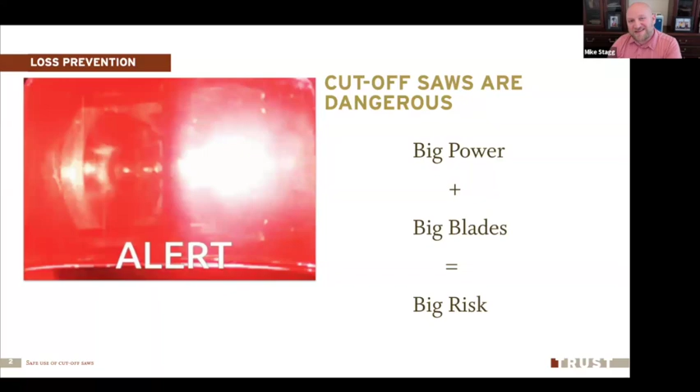These folks are now back to work, they're doing great, but this is something that's going to live with them for the rest of their life. We don't want it to happen to you, we don't want it to happen to anybody. We want to make sure we do these things right when we're using these pieces of equipment, every single time. These are very dangerous pieces of machinery, and we have to treat them with the utmost respect. That's why it's important.

We're going to talk through a four-step process to make sure we do it right and keep it safe every single time. We have to know the tool, we've got to know what we're dealing with, know the beast, how to use the beast safely. We have to know its hazards - what are things that could get us in trouble, and how do we avoid those hazards. And lastly, we've got to know the proper PPE to wear. We're going to talk about each of these four things separately today and how they play into keeping us safe when using this piece of machinery.

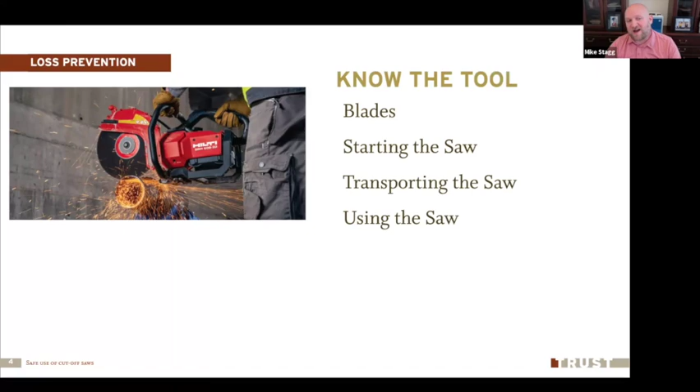First off, we've got to know the tool. As we talk about knowing the tool, it's another four-step process: the blades - got to know the difference between different blades that can be installed on these saws, because that's important and helps drive some of the safety requirements we're going to talk about. How we safely start the saw, how we safely transport and move the saw, and lastly, how to actually use that saw and do it safely. All goes into knowing the tool.

Let's talk about blades first. The first blade is probably the one we use the most, probably our most common - it's the diamond blade. Now, all the blades are going to have plastered right on the front of them what kind of blade they are, what they're rated for, what kind of media they cut through. All that kind of stuff is going to be listed on the blade itself.

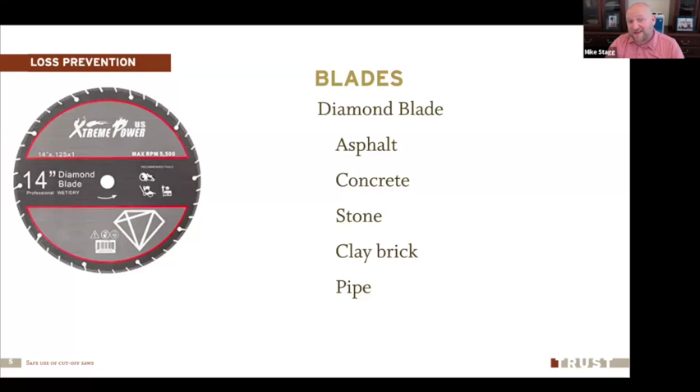With the diamond blade, they have teeth - they can be aggressive, they can be not very aggressive. These diamond blades are used to cut asphalt, concrete, stone, clay brick, and pipe. So that's the kind of media that they're used for, and those are the only types of media they're used for.

Also with the diamond blades, they are made precisely for their intended use. Don't use a diamond blade on a piece of media that it shouldn't be used on. They are rated and used for your saw's specific RPMs, so make sure that you match the RPM of your saw with the RPM of the blade. Don't use a blade rated for a certain RPM on a saw that goes to greater RPMs than what that blade's rated for. What can happen? That blade can break apart on you. So we've got to make sure we're using the blade precisely for its intended method within the specified RPMs of the machine.

Now with these diamond blades, there are a couple of different kinds of orientation with the teeth. More teeth on them is going to equal a smoother operation of that blade.

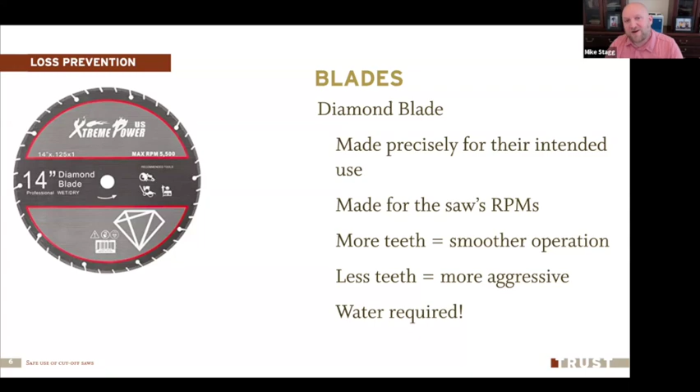What's important to note with the diamond blade is that water is always required when you use a diamond blade. No exceptions, you've got to use water. These blades build an intense amount of heat and they need to be cooled down, so we've got to make sure we use water with a diamond blade.

Your other blade that you can use is what we call an abrasive blade. An abrasive blade doesn't have teeth, it's an abrasive piece of material. We can use these as well for asphalt, concrete, and stone, much like the diamond blade, but these blades are specifically for ductile cast iron and steel. So if you've got ductile cast iron, maybe old pipe you're using to cut, this is what you'd use, you'd use that abrasive blade. You wouldn't necessarily use that diamond blade.

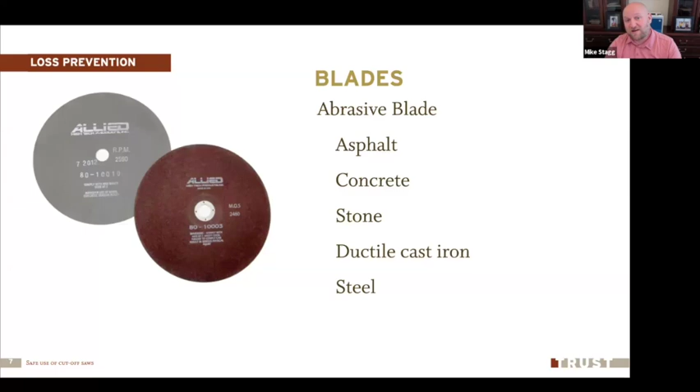This is where that abrasive blade comes into play, cutting steel, you could use an abrasive blade. Now, abrasive blades are also made precisely for their intended use and made only for the saw's RPMs, same as the diamond blade. Always only for their intended use and rated for the specific RPMs of the machine. Make sure that blade is within the range of the RPM of your saw. If your saw revs to a higher RPM than that blade can handle, don't use that blade on that saw.

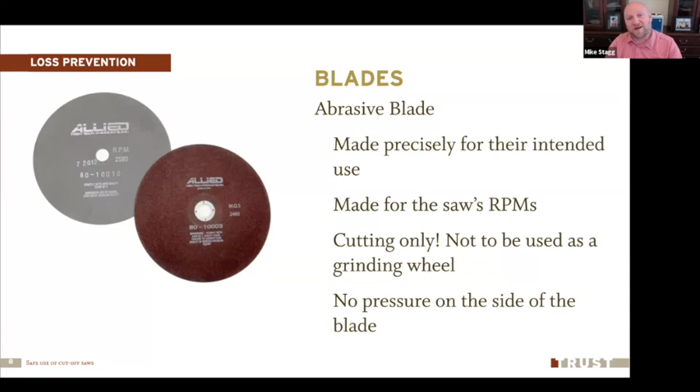Very simple, these abrasive blades are used for cutting only. We're going to talk in a few weeks about grinder safety, and we won't mention demo saws in the grinder safety webinar because they are not grinders. Make sure they are not used as a grinding wheel, they are only used for cutting. Make sure there's no pressure put on the side of these blades. If you get pressure on the side of an abrasive blade, it's going to bust apart on you. Make sure there's no pressure being pushed or put on the side of that blade.

With the abrasive blades, there's a couple of different types. You have a blade made out of aluminum oxide, and those blades we use for metal. Then you have the silicon carbide blades, and those are used for concrete. So you've got to think about this: if I've got a concrete roadway I have to cut and I'm going to use an abrasive blade, I've got to make sure it's silicon carbide. Then if I get down there and have ductile cast iron work to cut through, I've got to switch my blade out from the silicon carbide blade to the aluminum oxide abrasive blade in order to safely cut that piece of metal.

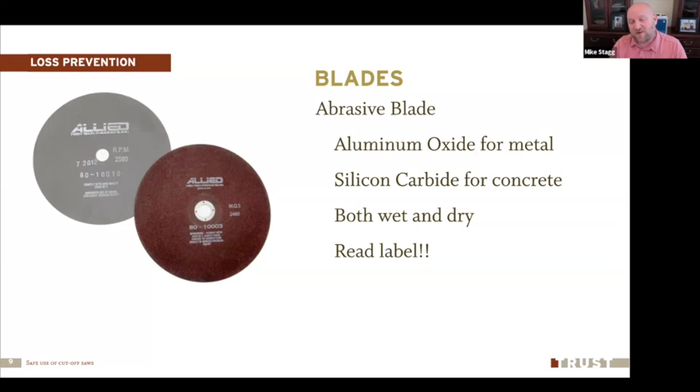Make sure you're only using the saw for its intended use on its intended media with the right type of material. All the blades are going to say right on them exactly what they can and cannot be used for, so make sure we're using it for the right type of media. Now, these abrasive blades can be used in a wet or dry application, they don't always require water. Again, read the label, manufacturer's recommendations are not just recommendations, they're requirements. Make sure you follow all the manufacturer's requirements when you install one of these abrasive or diamond blades and you're using it for its intended purpose.

Now, each time before you start the saw, you've got to inspect the blade before its use. Does that mean if I stop the blade and set the machine down, go do something else, come back and restart it, I've got to inspect the blade again? Yes, it does. Every time before you start the saw, you've got to inspect the blade. If you find anything wrong with that blade, swap it out, get a new blade in there. It's not worth it. If there's cracks or missing teeth, get rid of that blade. Don't use a dull blade, don't use a blade that's worn. A missing, irregular, or worn cutting edge on an abrasive blade is very hazardous.

Don't want to use that kind of blade. Look for a warped or unevenly worn blade, something that isn't worn correctly. Swap that blade out. A sharp saw is a safe saw.

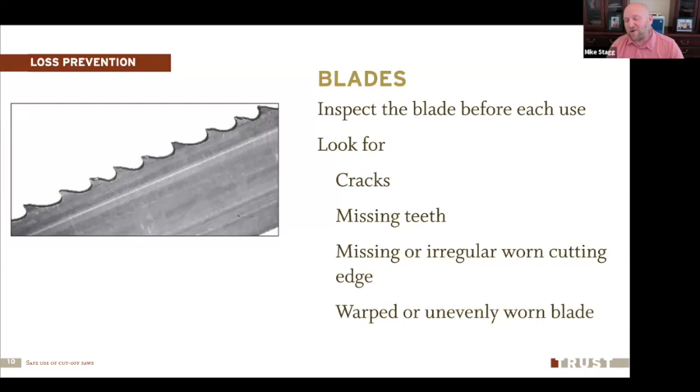A dull saw is not a safe one. Make sure that it's sharp and there's no cracks, missing teeth, or any kind of warping or irregular worn patterns in that blade. If there are, swap that blade out.

Before starting the saw, we also have to perform a visual inspection of the entire saw. We're going to inspect the blade very thoroughly, but we're also going to inspect the saw itself. Make sure we have a blade guard and it's in place.

The blade guard is not optional, guys. I know some of us move it out of the way because we can't see what we're doing, but the blade guard has to be there, has to be installed. If you don't have an installed blade guard, you shouldn't use the blade. That's simple. Adjust the guard for whatever cutting angle you're going to have.

Make sure you stay 10 feet away from any kind of fueling source. So if you bring gas cans out there that you fill up the saw with, make sure those gas cans get at least 10 feet away from the point of operation of that saw. Make sure when you're fueling up that you use the proper gas oil mix. Read the manufacturer's recommendations and requirements and make sure that you follow those to mix your gas and oil correctly so the saw functions correctly.

Always make sure you have a nearby fire extinguisher. I know many of us have those fire extinguishers on our trucks. This is a great time to get down that fire extinguisher and put it right by where you're going to be working, just to make sure that if something goes haywire, that you've got a fire extinguisher there.

Now we're going to check a lot of things in this visual inspection. We're checking that blade guard. We're going to check the rip and pull cord, make sure that it's in good shape. We're going to check all the bolts and the screws and make sure that everything's tight and secure for us when we're going to use that saw.

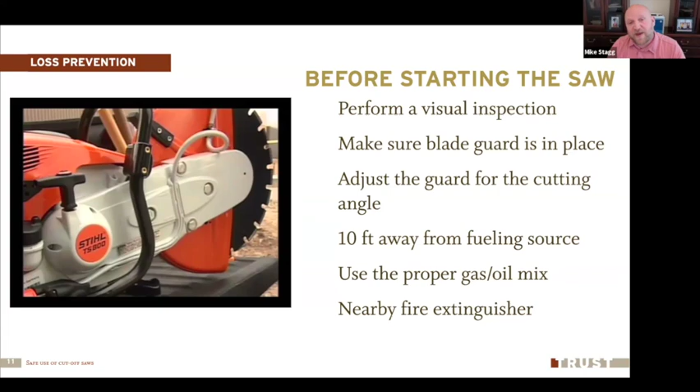Again, this needs to be done every single time before you use the saw. So if the saw's been off and you're going to turn it on and rev it back up, you need to check it again. You need to do your visual inspection again.

Now, when we talk about starting a demo saw, we're never ever going to drop start the saw. What's a drop start? You hold it in your hand and you rip the rip cord out. That's a drop start. Or you pull on the rip cord and you let the saw drop. That's also a drop start. So if we're holding the saw in one hand and pulling the rip cord with the other, with it held off the ground, that's a drop start. We don't want to do that.

These saws generate significant power, and because they generate significant power, they also generate significant torque. Torque is what is going to cause the blade to move and to walk on your pieces of material. The weight of the saw is going to cause that blade to drift downwards, because of the way the saw is weighted, the way the fulcrum is where you grab the handle on top, it's going to cause that blade to go down because of the way that saw is built.

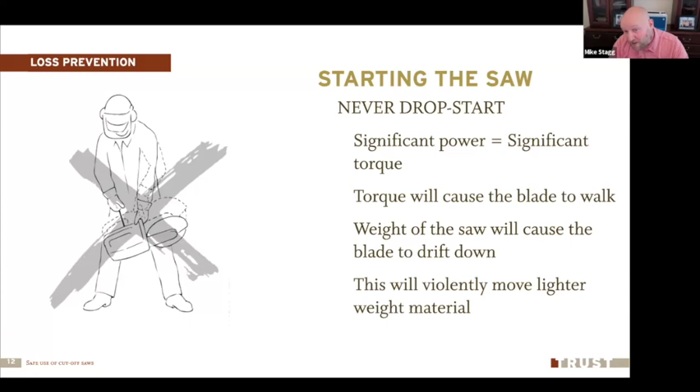What this means is when you start a cut or when you put that saw into material, it's going to want to violently move anything that's lighter weight, because if it pulls it, if it's generating that torque, it's going to want to violently move that out of the way. So it's important when we start the saw that we never drop start it.

We never hold it in one hand and rip the cord with the other. We always start with the saw on the ground. Place the saw on the ground, place one foot on the hand guard or through the handle, put some weight down, and make sure that it's secured to the ground. Make sure the area around you is clear and you're on good footing. Then you're going to hold the saw firmly, with your right hand on the rear handle and your left hand on the top stabilizer bar.

Then what you're going to do is take that right hand and rip the cord with the right hand to start it up, while placing pressure down with your foot on that bar and holding tightly on that rail in what we call a power grip.

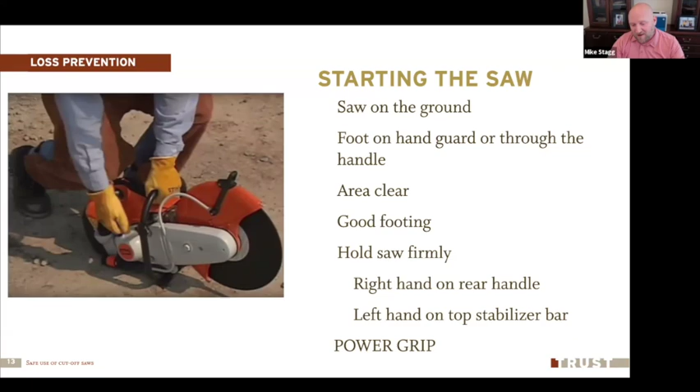Now what is a power grip, you might ask? A power grip is an underhand grip, four fingers laced all the way around that bar with your thumb locked across the top. Don't go overhand, it's easy to slip out of your hand. Underhand power grip with the bar right in your palm, make sure all four fingers wrap tightly around that bar and your thumb goes over the top.

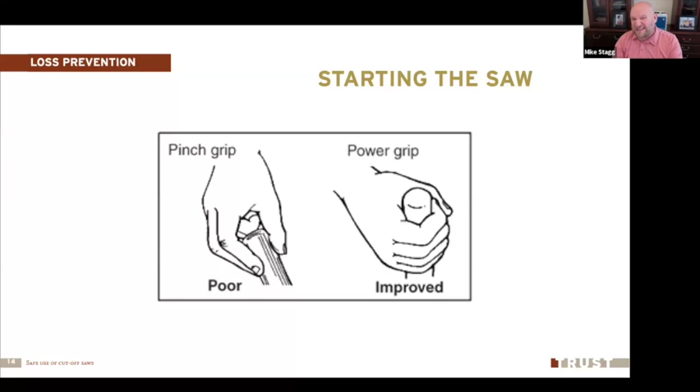Hold that thing tight. Don't let the saw control you, you control the saw. You're the master of the beast. Don't let the beast master you.

Now, when we're using the saw and that saw is ready to go, always make sure we work clear of obstacles. Make sure everything's cleared out, and there's nothing in the way that could get caught by the saw or by the material being cut.

Never ever work alone when working with a demo saw. This is not a lone wolf job. You can't just take the demo saw and say, alright, I'm going to go start cutting, you guys come out when you're ready. Make sure you're there with at least one other person, if not two, three, or four others. This is for safety, so if something does happen, you've got people there to help you. It's also to make sure we're doing it right every single time, with that other person there to help, saying, hey, did you remember to do this?

Did you remember to check the blade? Let's both take a look, make sure we both feel comfortable with how this blade looks. Make sure you're not drop starting the saw, making sure we're doing it right every single time.

Make sure there's a stocked first aid kit in case something happens, and people know where that first aid kit is and how to use it to help stop bleeding. Tourniquets - anytime you're using a demo saw, you should have a tourniquet inside that first aid kit, because if something gets sliced, that blade is slicing hot and fast. Having a tourniquet on hand is going to be critical in case something happens.

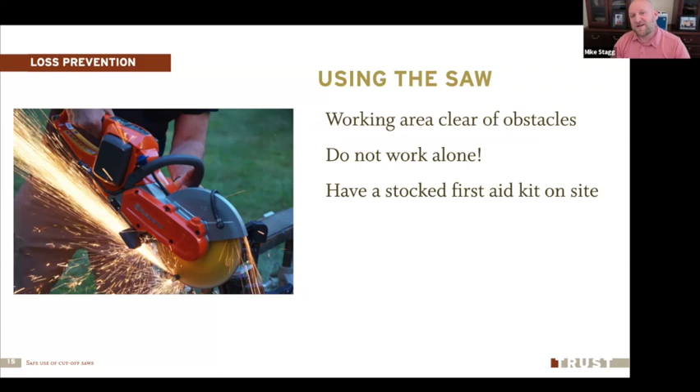Now watch for the hazards when using the saw. There are hazards that come up as you're using that saw. First and foremost is exhaust fumes - you're putting out carbon monoxide from the gasoline, from the engine running. If you're down in a confined space, you might need to do some air monitoring because you're displacing the oxygen there and replacing it with carbon monoxide.

And if the oxygen content falls below what we need it to stay inside a confined space, we're going to need respiratory protection. So never use one of these demo saws inside a confined space without respiratory protection in place. We need to have that done and in place before we start up that saw inside that confined space.

Always make sure we chock round pipes. Why do you want to chock a round pipe? Because you want to make sure that material doesn't move on you when you're making the cut, or after you've made the cut, that it doesn't start to roll away on you.

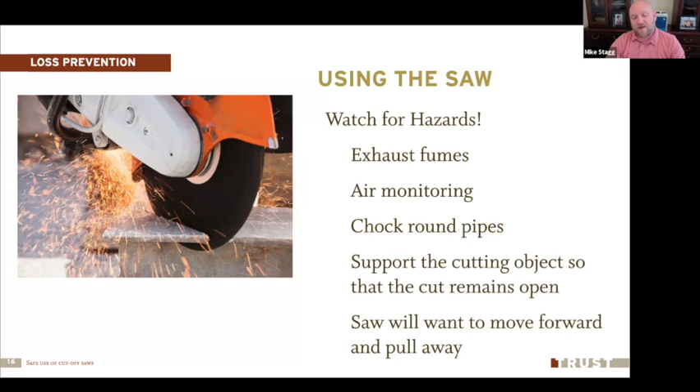Support the cutting object so that the cut remains open. Every time you make a cut with a demo saw, you want to make sure that cut is supported, so that the material, after you've made the cut, doesn't fold in on itself and pinch that blade. We have to make sure that cutting object is supported.

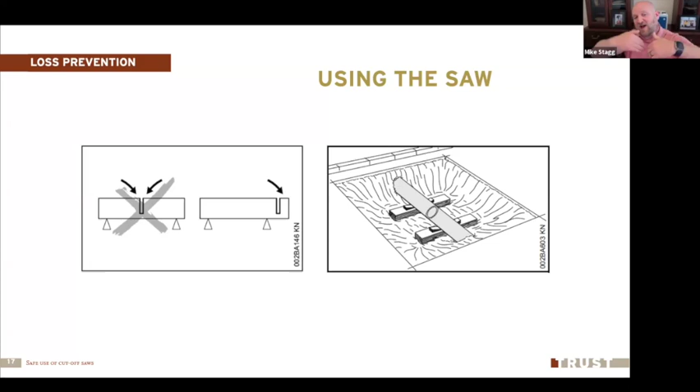Now, this is a good representation of that. You can see here on the left, we've got that cut right in the middle where our supports are on the edges. If our supports are on the edges and we make the cut in the middle, what's going to happen when that cut breaks through? Yeah, that material is going to fold in on your blade. We want to make sure we're supporting that cut and making the cut outside of where that support is. So we've supported here, like you see on the right-hand side, and we make the cut outside of the support so the spoil falls off on the end and doesn't cause the rest of the material to collapse in on itself and pinch your blade.

Very important here when using the saw is to never stand in line with your cutting wheel.

Never stand in line with that cutting wheel. Always stand out to the side. Don't have the saw right in front of your body when you're making the cut. Pull that saw out to the side as you make that cut. This assures if there is a kickback of the saw, it's not kicking back into you, into your face, and that saw is not coming back at you at full rev. Instead it kicks back up and away from your body.

Do not bend over your cutting wheel. Don't bend down and look down at what you're doing over the cutting wheel because, again, if you get kickback, it's coming right back at your head.

Do not ever work with a demo saw above shoulder height. If you have to reach up over your shoulders, you can't use a demo saw. It's too high for you. You need to make another plan to make sure you can take care of that.

Never operate the demo saw with only one hand. It's a two-hand operated tool. Make sure you do it that way every single time.

Never ever push down on the saw. Let the blade do the work. Don't push down on the saw. If you're having a hard time getting through the material where you're having to put a lot of pressure down on that saw, either number one, that blade's not sharp enough, or number two, you're using the wrong blade, or number three, you shouldn't be using a demo saw on that piece of material. Don't push down on the saw. Let the saw do the work.

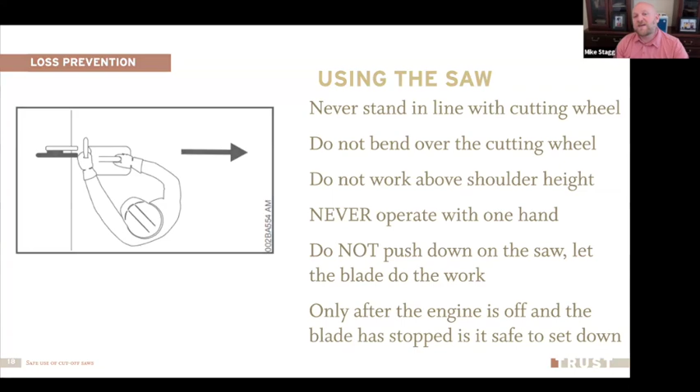Now, when we're gonna make our cuts, first off we got to decide the cutting direction. Where are we gonna go at it? Then we're gonna grind a groove, with a grinder, not your saw. Don't use your saw to grind that groove. Grind that groove with a different piece of machinery.

Then you're gonna find that groove and you're gonna pull your cutting wheel into the work. Pull the cutting wheel into the workpiece. Don't push or make a plunge cut with a demo saw. Never do that. That's how you get a blade bind, and that's how you get a kickback. Don't ever push or plunge a demo saw. It's always a pull cut.

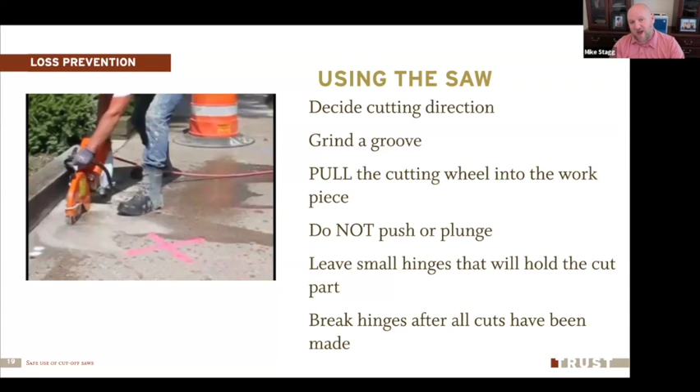You want to make sure you leave small hinges that will hold the cut part open. Always make sure you leave the cut open when you're making that cut. Don't ever cut all the way through with a demo saw, because if we do, it has a propensity to break and bind the blade. Only break the hinges after all the cuts have been made. Once all the cuts have been made, use a different piece of material or machinery to cut the last hinge off to break that cut apart.

All right, let's talk about kickback. We've talked about kickback just a minute, you've heard me talk about it. Let's talk about it here in a little bit more depth. Kickback happens when the saw is suddenly thrown up and back in an uncontrolled arc. It's coming back up at you.

Kickback can occur when the cutting wheel becomes jammed above the upper quarter of the blade. So when we're using a demo saw, the only part of the blade that we should use is the lower quarter, the bottom quarter of that blade. If we're using the top quarter of that blade, the upper quarter, we're gonna get kickback. That's just the way it's gonna work. Because of the way the blade moves and the amount of torque that's generated by that blade, we're gonna get kickback if we use the upper quarter. The lower quarter is the only part of the blade that we should be using.

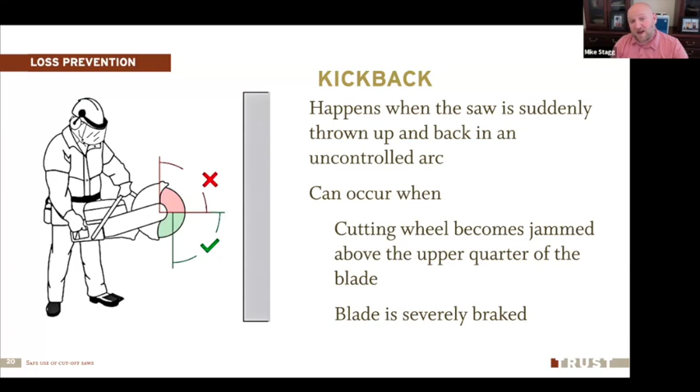Or kickback is gonna happen if the blade is severely braked. If we get some material coming down on the sides of it and stopping that blade from moving, it's gonna rev and kick back right up at you. So in order to reduce kickback, we got to work cautiously and methodically. Got to take our time when we're using a demo saw. Always make sure we're holding on tight and firm with the power grip on both our handle and the grab handle. Never use the upper quarter part of the cutting wheel.

Again, only the bottom quarter of the cutting wheel is the only place we should be making the cut. Always introduce the cut without pushing or twisting. Introduce it into a nice smooth pull cut. Don't twist or push into that cut.

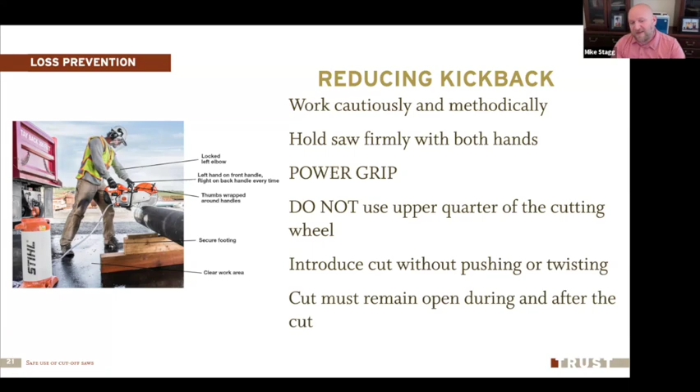Now let's talk about personal protective equipment. Close fitting clothes so nothing gets caught inside the blade. Chaps are very highly recommended. Make sure you tie back your long hair. Safety shoes with steel caps or a composite toe box, 100% required. Safety glasses or goggles, 100% required. Hearing protection, 100% required. Heavy duty leather gloves, 100% required.

We've got to make sure we're kitted out correctly in our PPE to use one of these pieces of machinery: safety glasses, safety shoes with steel or composite toe caps, hearing protection, heavy duty leather gloves, and head protection in the form of a hard hat. All of those things need to be in place when we're using a demo saw.

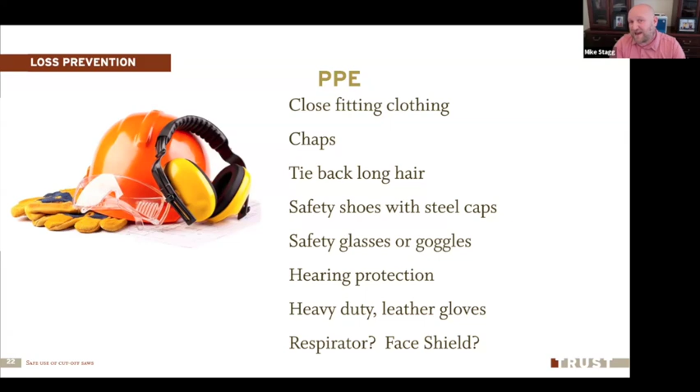Think about other things like a respirator and a face shield that we might need if we're in a confined space. We'll need the respirator. We need to have respiratory protection.

PPE is essential. It's also essential to know that there are alternatives to these demo saws. Demo saws are very, very dangerous. There are alternatives and things we might want to look into in place of the demo saw, things like a pipe cutting machine, a pneumatic ductile iron chainsaw, or a manual portable hacksaw.

There are tools that are much better for our use than one of these demo saws. They're much safer, they could be easier to use. Look into that. Look into some alternatives.

Rule number 2, never drop start the saw. Always start the saw on the ground. Hands in the power grip, foot through the handguard or the handle, and pull the ripcord, then place pressure on the saw. You control the saw. Don't let the saw control you.

Next rule, do not use the upper quarter of the cutting wheel. The only part of the cutting wheel we're going to use is the bottom quarter, the bottom quadrant of that blade. That's the only place we should be making cuts. Get into the upper quarter, and you're going to get that kickback.